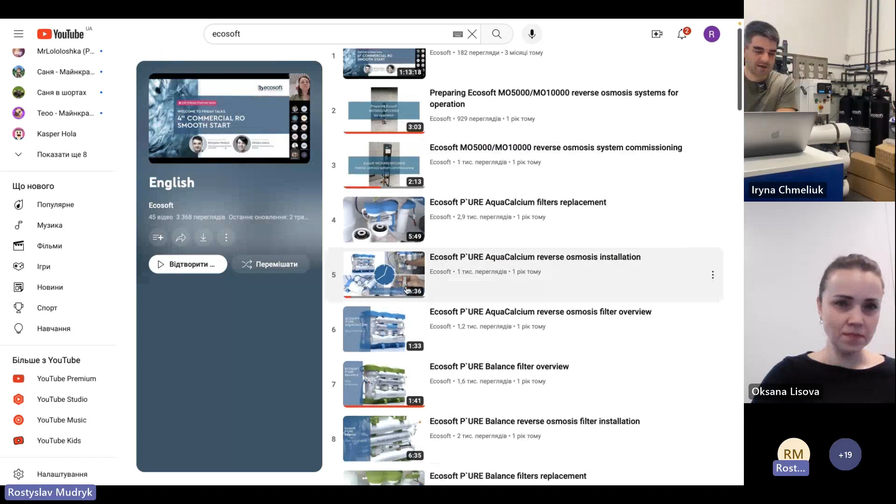So this is a little bit of the information part. And today we are going to talk about commercial reverse osmosis, industrial reverse osmosis units. As usual, I will start with the introduction of these units on our web page. We work a lot on ecosoft.com, so if you don't visit it for a week or two, you will find more and more information uploaded. So I always advise, if you need information on a product, just go online, go to the product card you are interested in, and you will find new information available.

So today our topic is 8-inch RO units. Basically we produce two lines: the inox line and the regular line. The capacity of the units ranges from 2 membrane elements, the smallest, up to 9 membrane elements in the inox version, and the regular series ends with 48 membrane elements in one unit. We also have a range of 8-inch membrane elements that we recently added to the web page, so you may find both the technical documentation and the product portfolio on industrial membranes, starting with the Ecosoft low pressure membrane, as well as the FilmTec membranes that we use in our units.

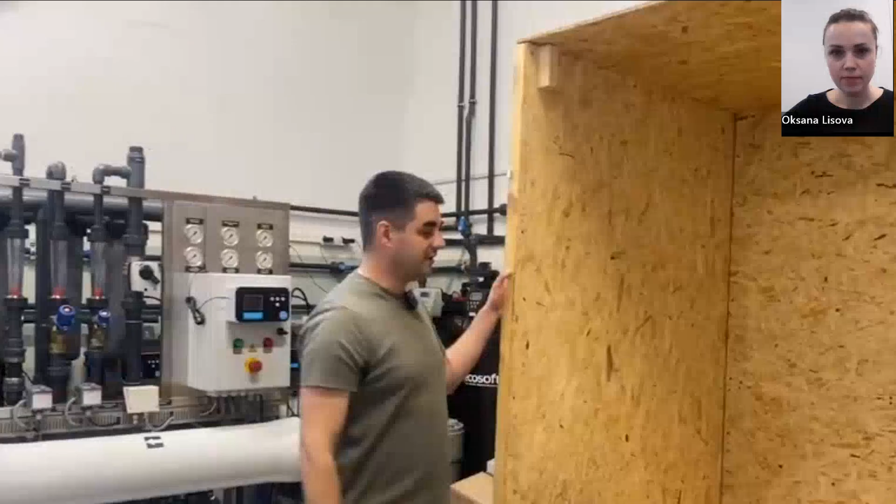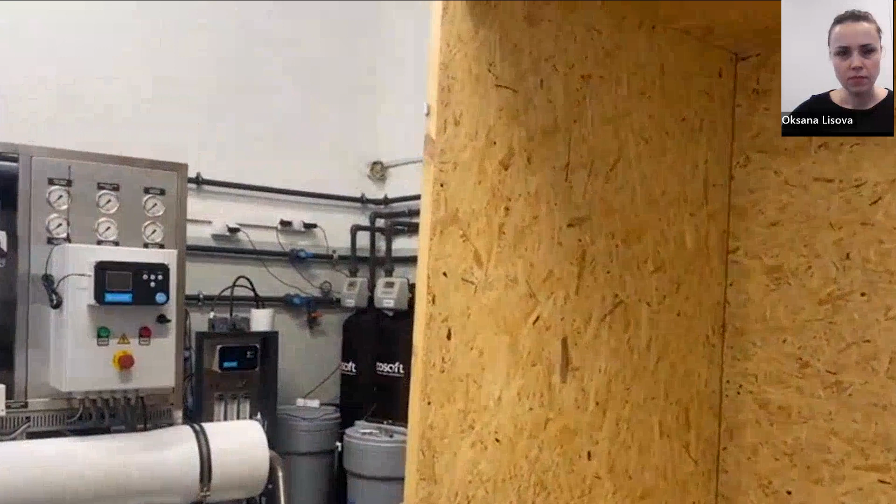So first, we have to explain that all the units are delivered in a wooden crate. So this is the wooden crate with easy removal of the wall. By supplying this way, we ensure that you will get the unit safely. Then inside the crate you will find, of course, the unit. We just extracted it from the wooden crate, and also you have a secret box. Why is it secret? Because

Many customers. Rosti, I'm sorry. Maybe something is wrong with the sound, because I suppose we hear you not through the microphone, we hear you through the laptop. Yes, give me a moment. This is the microphone. Thank you. Now you should hear me better. Try to come closer to the crate and then speak.

Let's check. So this is the box with the small parts, and I call it a secret box now, because many customers just forget. They take it out of the box and just forget about it. But inside there is much useful information and many useful parts. So first of all, you have a folder with the documents, and I will show briefly. So this is the manual for the electrical part. This is very useful. I will come back to it later.

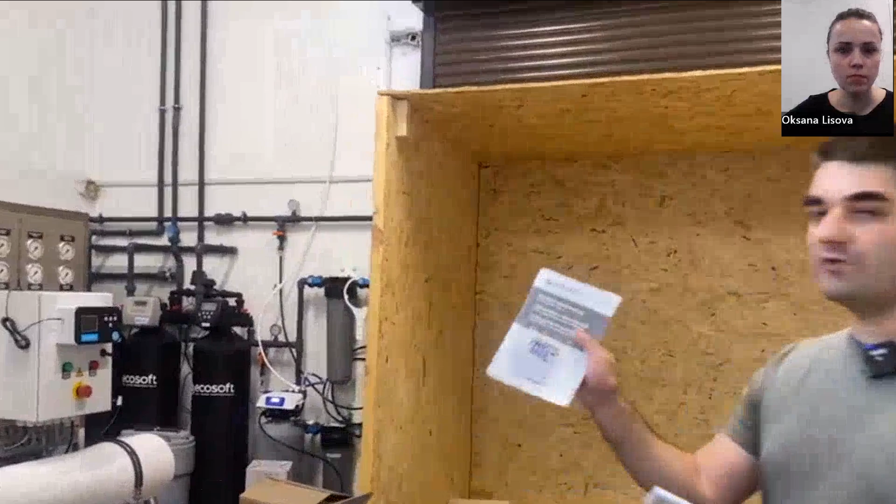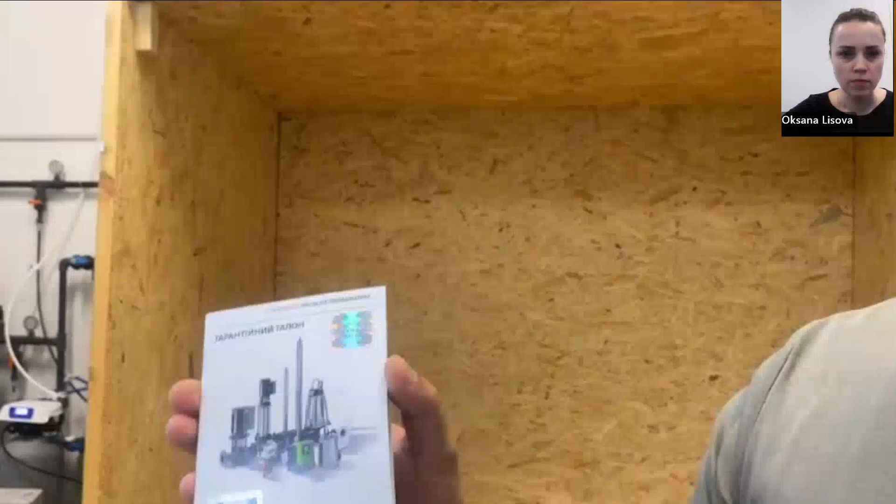Then you have a warranty. Then you have the manuals, both for the system and for the controller. Then you have the warranty for the Grundfos pump. This is very important because this is a worldwide warranty. So in any country where you do the startup, Grundfos supports the pump.

And if you have any problems during the startup, or any failures during operation, you may contact the local Grundfos service center via us or directly, and then you would receive support from Grundfos globally. This is very important. Also, you have the installation and instruction manual for the CR pump.

As this unit is equipped with the Econnect controller, it has the plastic SIM card. The SIM card is already installed in the controller, but the holder of the card is here. So if you have any issues, you have the identification number of the SIM card. So it's better to keep it. When you contact technical support, you can tell them the number, and then they will understand what system you are starting up. So basically, this is the scope of supply.

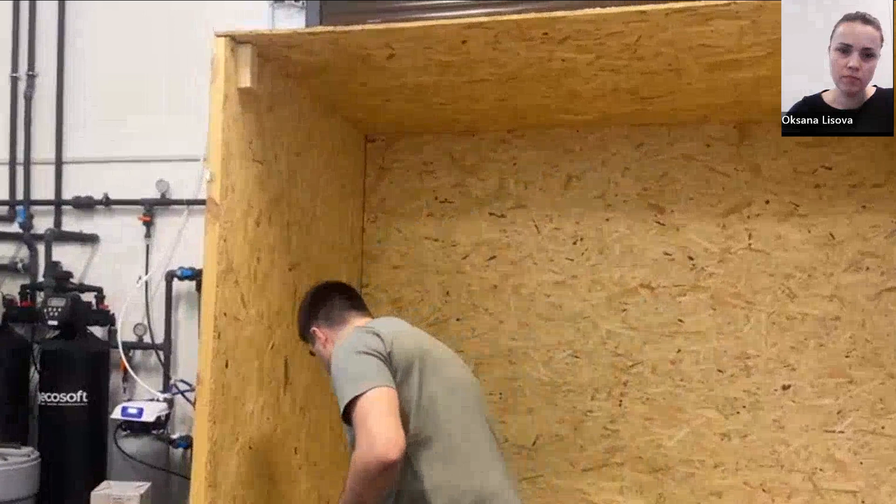This is the documents I have shown. Then you have the cartridges for the sediment filters, and also we have the adapters. These are the spare adapters. These are 1-inch adapters for the high rejection membrane, and this is a very small but important part. And inside the pressure vessels, we have the adapters that are installed for the high flow membranes. I will ask my colleague to show it.

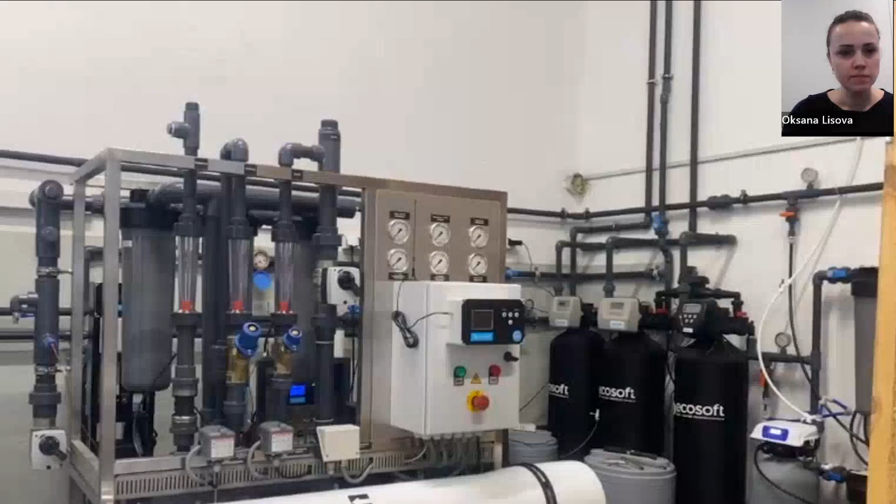And inside the unit, we have the 1.125 adapter installed. For example, if you use a membrane like XLE 440, which is a high flow membrane, you just leave this adapter in the pressure vessel. But if you use the high rejection membrane that provides a low flow, then you have to replace this permeate adapter with another one that is in the box.

So it is important that we supply 2 types, and you don't have to buy or source these adapters separately. But remember that they are in the box, so you have to find them there. I draw attention to this point because we have some requests to technical support where our dealers do not find these adapters and source them somewhere else, making the startup more complicated. So this is the answer, Oksana, to your question about the scope of supply.

Yeah, thank you, Rosti. If someone has any other questions regarding this, you may ask, of course, online, or you can ask your question via the chat. We already have questions. Yes. Maybe I can go through them.

So customer-made units are also available, not only the standard one. Of course we prefer to supply the standard units that we almost always have in stock. But if you have any special requirements, it would be nice to know these requirements, and then we have 2 options. Option number 1, we could meet these requirements by using standard units plus options that we have in stock. This is one way. There is also a second option.

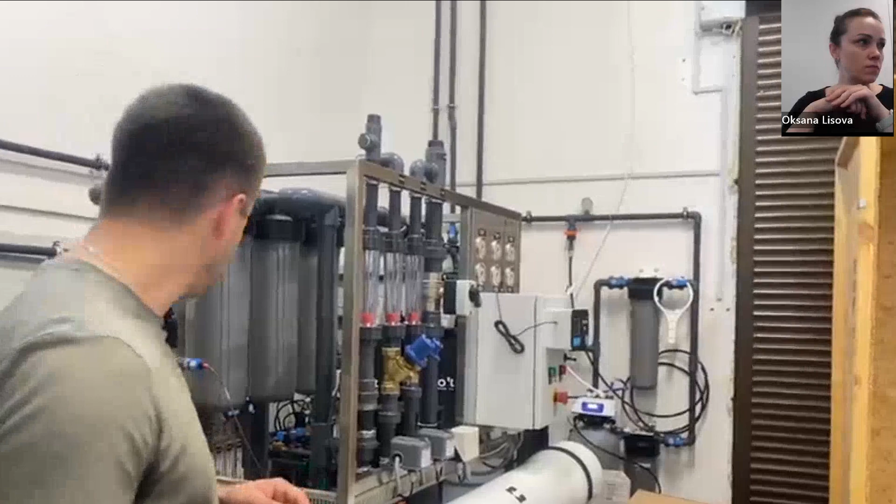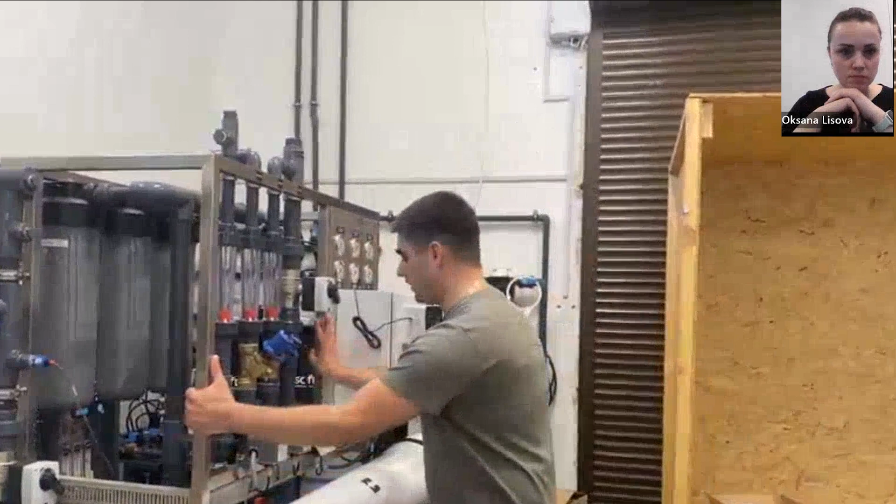So the inox line is not only the frame. When you buy an inox unit, it has the frame made of 304 stainless steel. Also, this inox line is equipped with wheels, so the system can be easily moved. I may show you how you can move it. Well, you need to apply some force, but generally it's quite easy to move this unit by one person.

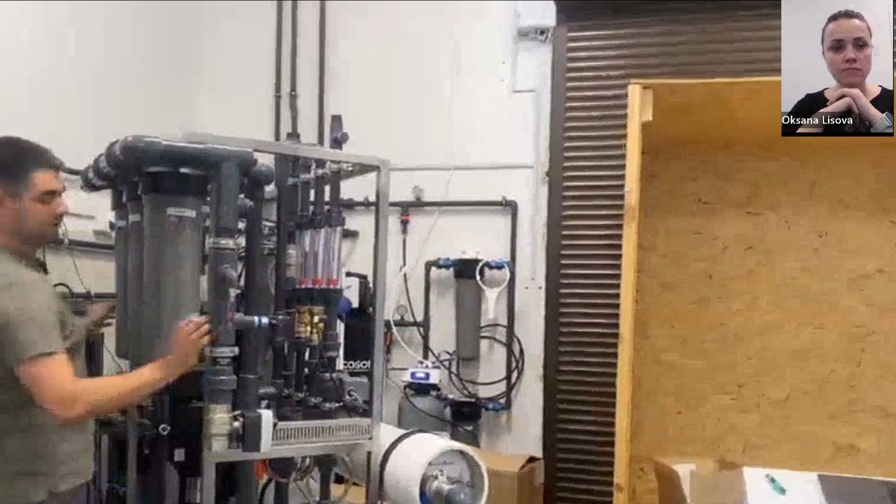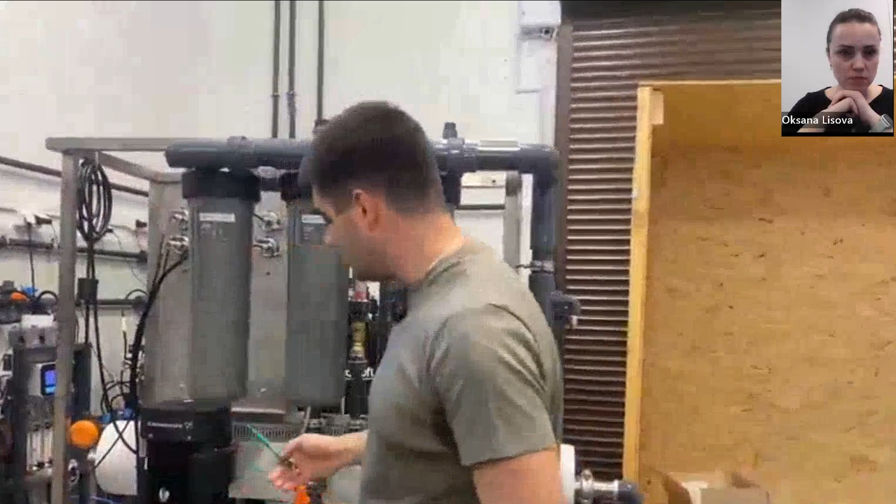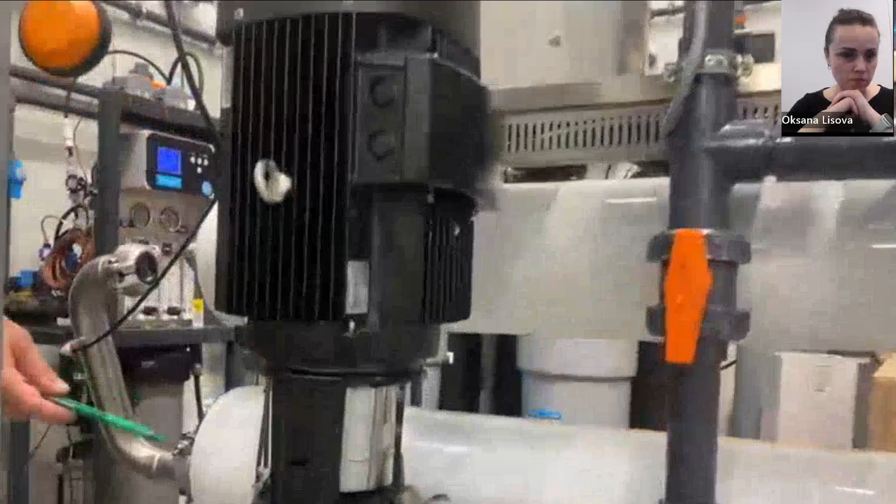And I would like to show what else besides the frame is made of stainless steel. I will stand here. So we have the high pressure line that connects the high pressure pump and the pressure vessels, also made of stainless steel. This is 316, and we may increase the pressure up to 15 bar. And this was our initial goal, just to produce a unit for the tap water, but made of stainless steel frame and stainless steel high pressure line.

And then eventually we discovered that many of our customers started utilizing these units for brackish water. So what they do, they put a little bit more powerful feed pump, not for 2 bar, but for 4 or 5 bar on the inlet. And then you can increase the operating pressure up to 15 bar. And if you have high temperature, like the Mediterranean countries or the Middle East, where the water temperature is a little bit higher than in the north of Europe, and if you use the XLE 440 membrane element or other high flow membrane element, basically you may do the desalination of brackish water with this particular unit.

And also this year and last year, we had a big project together with UNICEF in the south of Ukraine, where the water is delivered directly from the sea with TDS up to 7,000 ppm, and we actually utilized exactly this unit, the MO3, with Econnect for the desalination of water with even higher TDS. The only difference is that this unit provided around 1 or 1.5 cubes an hour of permeate, not 3 cubes an hour like we would have on tap water. But this is also an opportunity for how we could utilize our Inox series.

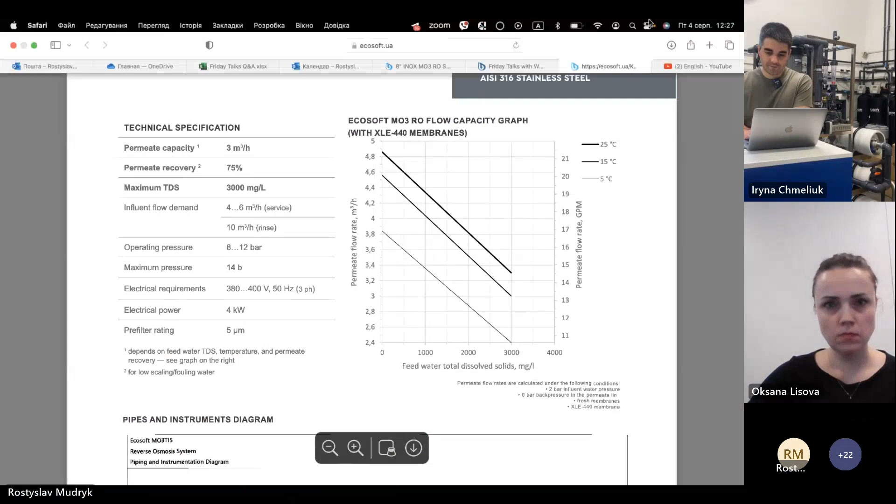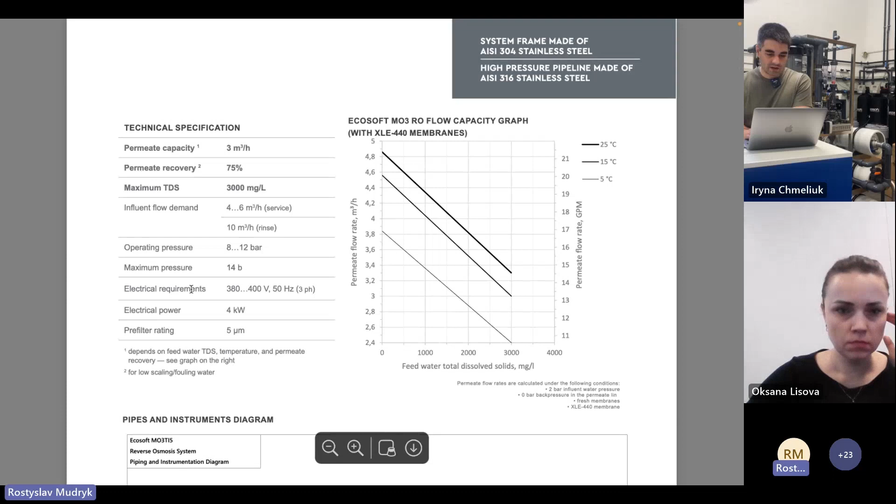So first, if you go to the main page at ecosoft.ua, here on the main page you have the button download the catalog. So you go to the catalog, and you may find the MO3, for example, this one. And here you have the graph that explains the influence of the feed water TDS and the temperature. We have here the curves for the 3 temperatures that I mentioned.

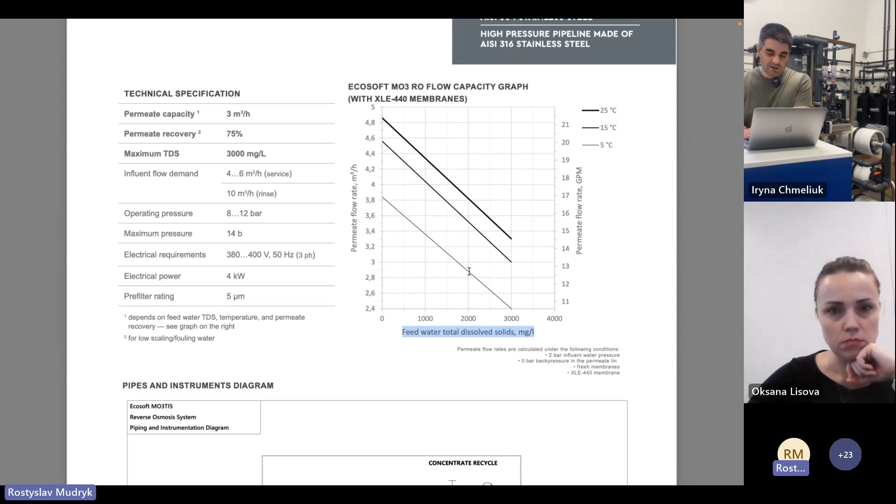And then you may find the capacity. For example, if you are in the north of Europe, in one of the Scandinavian countries, then you take 5 Celsius, and if your TDS is 2000 ppm, then your flow rate at 5 degrees Celsius and 2000 ppm would be a little bit less. It's like 2.9 cubes an hour.

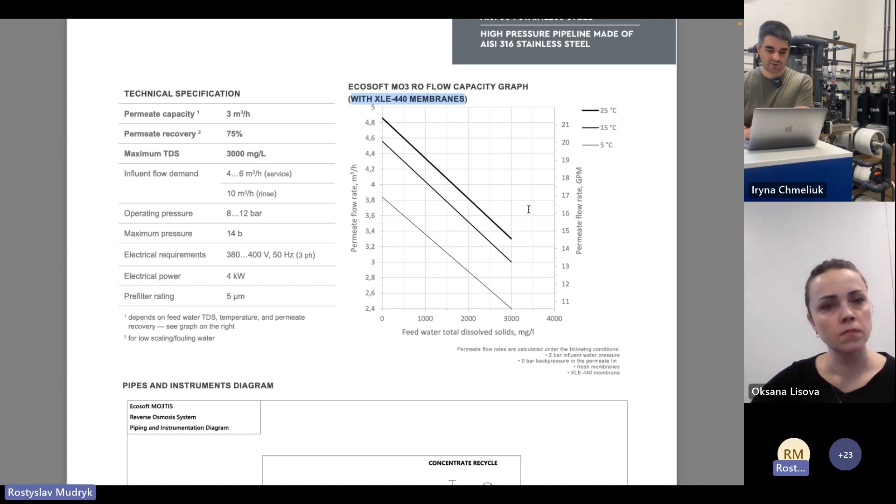It's important to mention if you use XLE-440. If you would use another membrane element, then you would have to do the calculation by yourself, or you may contact our technical support and they will assist you with the calculation.

Then we have a question from Raivis, perhaps. Yeah, you are absolutely right. It would be much easier to do the maintenance if the filters are located in front, and this is one of the projects that we are working on, to reframe the units and to make them more friendly for the maintenance, more, as we say, friendly to water professionals.

So then there is a question from Jalal about the 4,500 ppm TDS and the high recovery. So in this particular case, I would not go so high. With this kind of TDS, I would be around 70–75% of recovery. And what I would do, I would do the calculation for the saturation of the unit and for the saturation of the water. And I would also do the calculation of the performance in WAVE to see what would be the pressure and what would be the right membrane for this particular application.

For example, in the south of Ukraine, where we have the TDS of around 6,000 to 7,000 ppm, we go to the recovery rate from 50 to 60%. And by this, we reduce the salt concentration on the concentrate line. So this is the way how we use our serial products to treat water with high TDS.

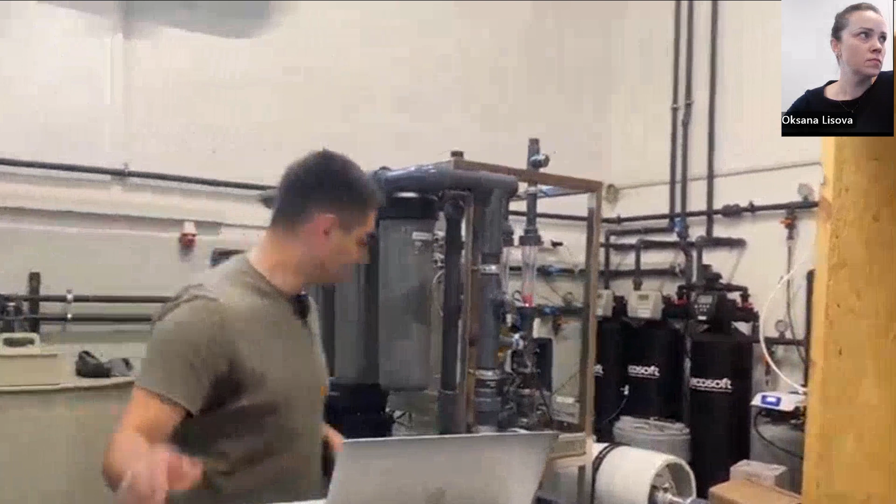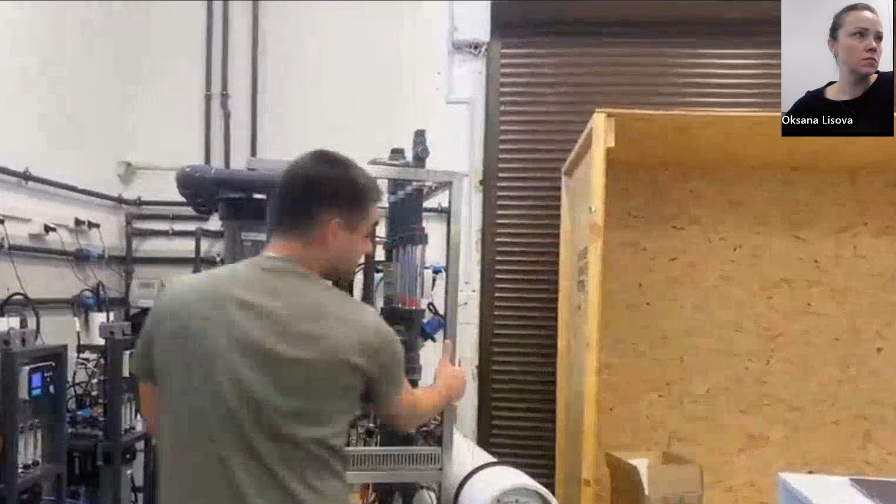Yeah, the system we have actually, I would like to show. I have to move the system again. Well, it has wheels, but sometimes you need a little bit more force. So I will ask if we can show.

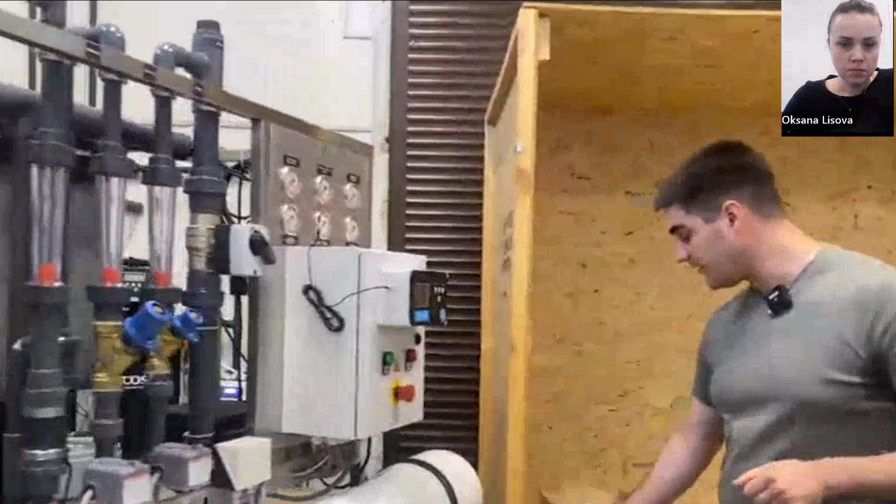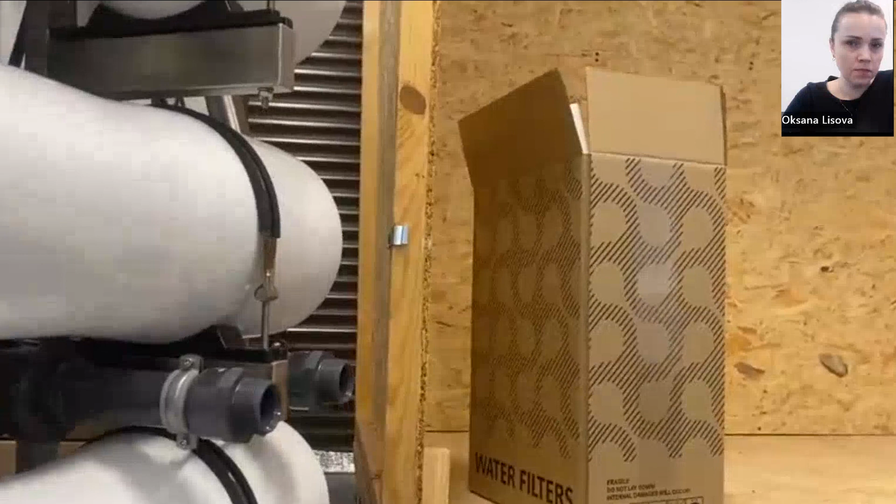So here we have the CIP inlet and outlet. So these are 2 threads, and these are ready to connect. So you may connect the CIP station to this particular unit, and then you could do the CIP right at the customer's place.

Also on the web page, you may find the information on the CIP available, because for all units that we have in stock, we have standard CIP stations that you may use to clean the systems. And of course, we may provide our manual on the CIP procedure as well as chemicals to do the cleaning, because we have quite a lot of experience doing that.

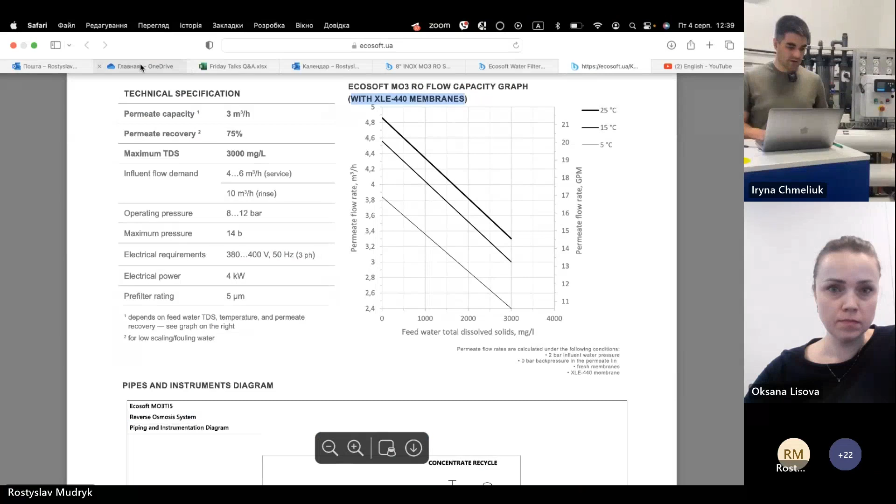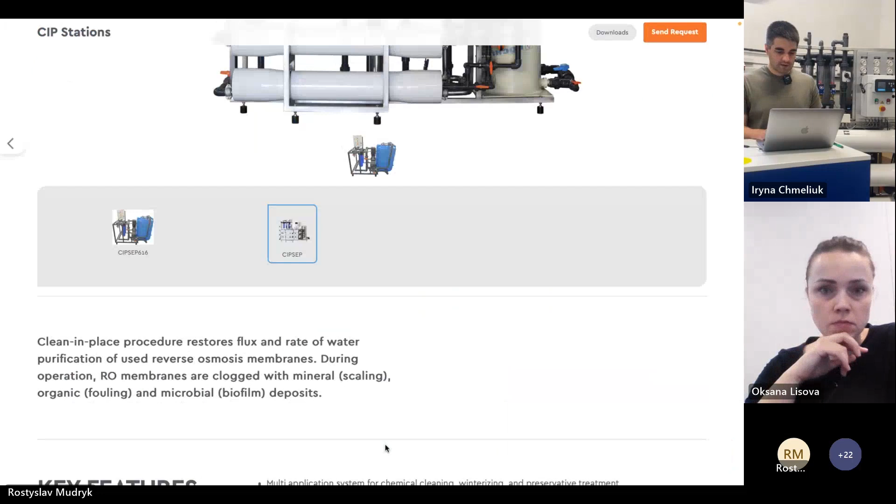Rosti, can you please extend the topic about CIP, because we also have the question from Enrico about our own CIP stations. What is the range? How do we divide them? So now you may see my screen. You may go to the web page and then go to the CIP station. Let me browse a little bit. Just a moment, I wouldn't go to the price lists, but we have the CIP units.

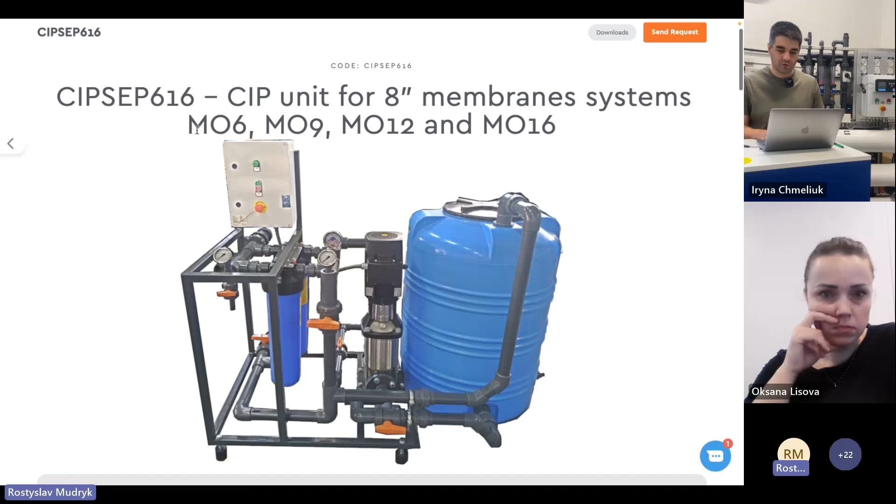For example, this one is good for units from 6 to 16 membrane elements. So this is one CIP station, and then here we have another one that fits RO units with 2, 3, and 4 membrane elements. And also, of course, we have larger ones that are tailor-made for the customer needs. But these two cover the complete range.

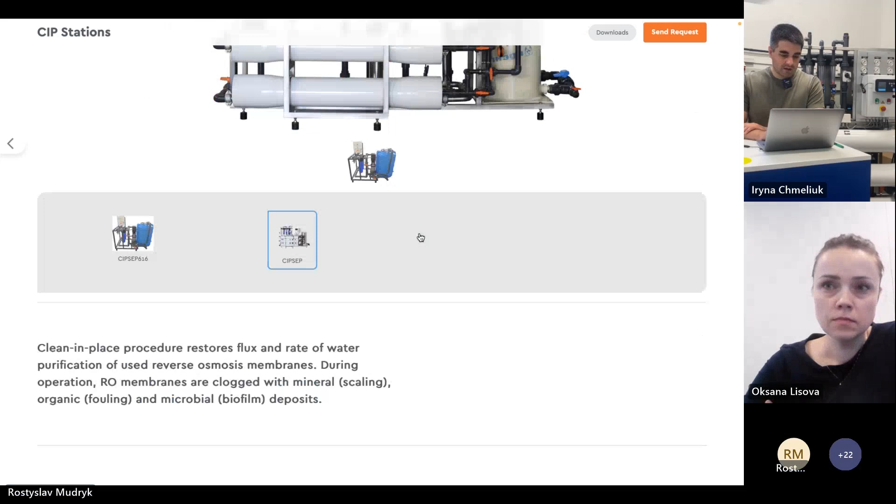Sorry, Rosti, I interrupt you. In most cases, the bigger ones, starting from MO16, like MO20, already have it built into the system. So they are integrated on the big industrial systems. Well, this is one of the options. We may also integrate the CIP stations in the larger units, as well as supply them separately.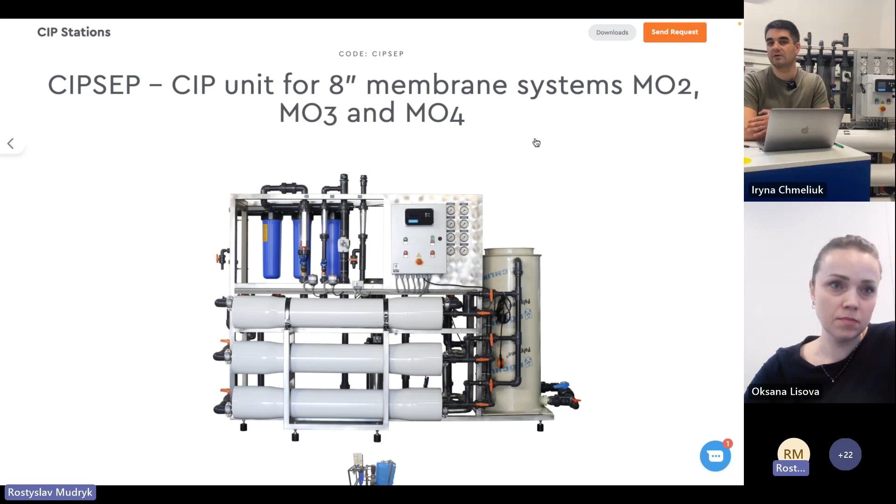Normally we do not provide the CIP stations on board. We prefer to supply them separately, because if it is on board, it makes the unit a little bit more complicated, and it is not always needed. I hope this answers your questions.

We have the question from Ravis. Yeah, there is a question.

So when we supply the CIP station, it has the flexible hoses, and then it has the fittings that make it quite easy to make the thread connection. We do not supply it with the clamps, because clamps are something more special, and maybe you will use your type of clamps. So we prefer to provide standard threads rather than clamps. This is the reason why we do so. But I agree that the fast connection maybe is more convenient for you.

Then we have a question from Enrico. Can you explain what SMBS is, so that I understand what you mean, and then I will provide the answer. What does SMBS stand for? Sodium. Okay. Well, when we do the CIP, we do not suggest doing it with sodium hypochlorite or chloric acid, because if the people on site are not experienced enough, they may easily exceed the pH level. This is the reason why we do not recommend using the pure chemicals. What we recommend is the chemicals provided under the Ecosoft or BWT brand, the special chemicals that have a buffer, so it's not easy to shift the pH outside the limits.

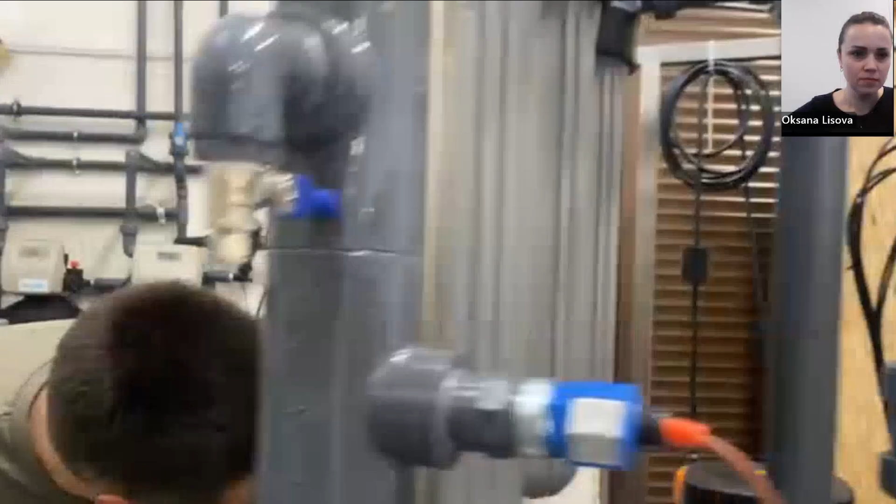Yeah, first of all, I would start answering your question, and then I will show how we suggest to do it. So if we talk about MO3 in the inox version and in the regular version, we would use the same pump, and it is CR. I'm asking Vitaly, my colleague, what is the name of the pump? Is it CR, this one? Yeah. This is CR 10-12, and this particular pump is used for both MO3 inox and the regular one. And of course, we can provide you information on the pump on all other units. But I would like to show you, I think I wouldn't move the system again. And also, you may use the Grundfos data center.

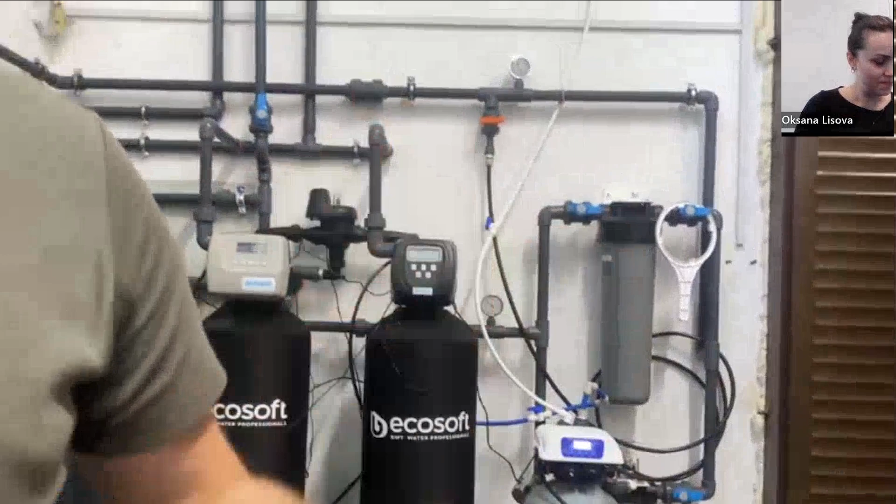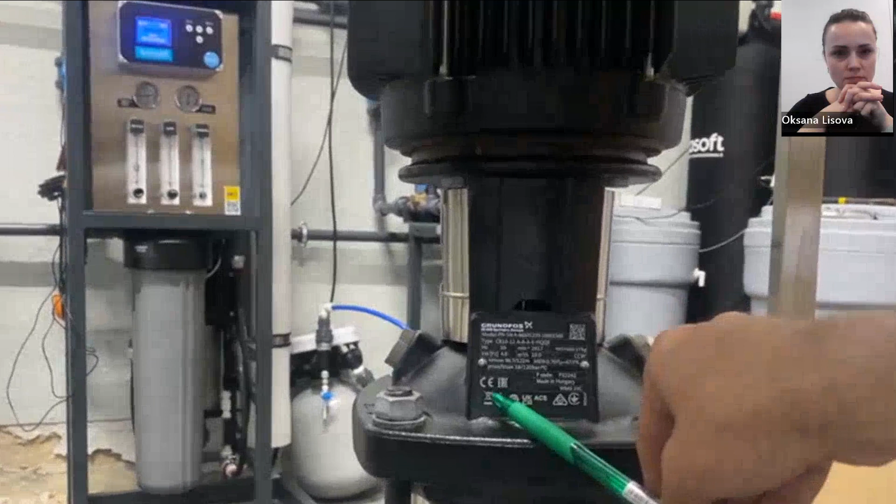And then on this shield, you may see, actually, I think we should go in front, it's better to show in front. I'm asking Vitaly to show because, to be honest, I've never checked the curves online in the Grundfos data center. But on this shield, you have to take this long number. Which one? So this is the number that is mentioned in the type. So this is CR 10-12 AAA, a little bit down, E. So when you input this particular number in the Grundfos product data center, then you would have the curve exactly on this model, and you may see the pump performance straight away. And maybe I will ask Alexei to put the link here on the Grundfos product data center, so that everyone knows exactly what we mean by Grundfos product data center.

Also, I have to add to the question of Oksana on the Grundfos. So on all RO units, we use the CR pump. This is the vertical pump with stainless steel parts inside. All the parts inside the pump that are in contact with water are made of stainless steel 304. And we could use these pumps up to 4,500 ppm on the feed water. And also, I would repeat it once again, I mentioned it in the beginning. We have the global warranty from the Grundfos factory on all pumps, of course on the CR pumps and also on the CM pumps that we supply with the 4-inch commercial RO units. And if you have any problems during the startup or maintenance, you may contact Grundfos locally by yourself, or you may contact them via Ecosoft, and then we help to solve the technical issues with the Grundfos pump in your country.

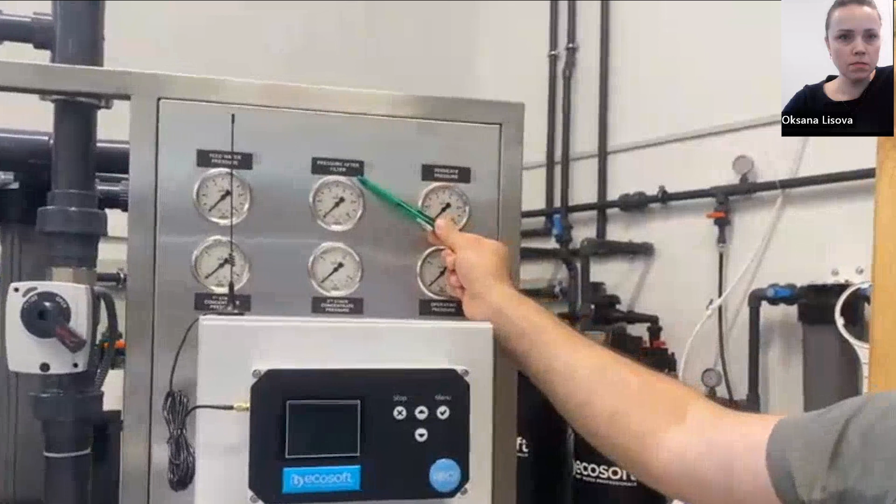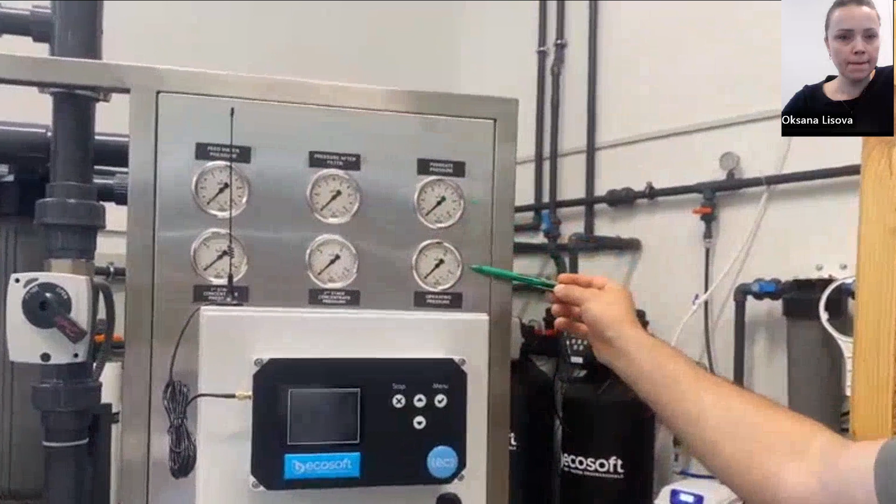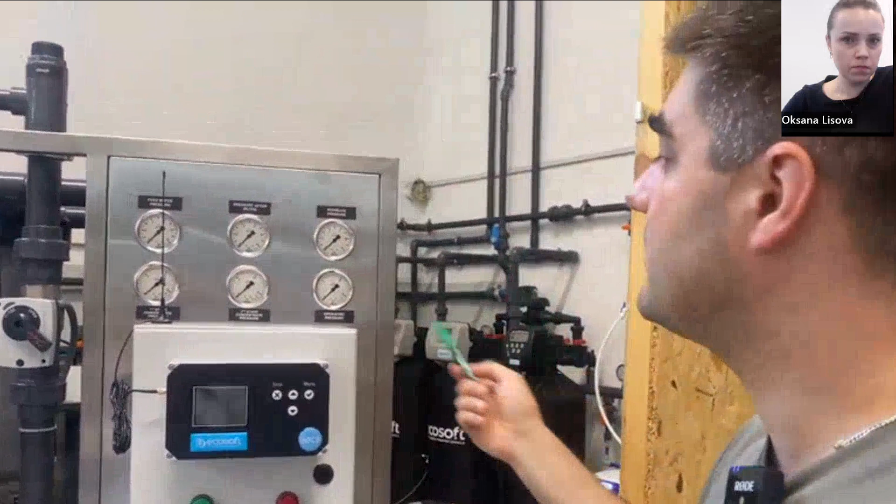On the unit, I see 6 pressure gauges. Is it a double pass? No, this is not a double pass at all. Let me explain a little bit the pressure gauges, since the question appears. So we have the feed pressure, then the pressure after the sediment filter, then the permeate pressure, and then the concentrate pressure after the first stage and after the second stage, and the operating pressure is the pressure just after the pump. So this is 2-stage by concentrate, not by permeate, and this is why we have the 6 pressure gauges.

And maybe I could also extend my answer a little bit on the double pass units. This is not an everyday question, but from time to time we receive questions on double pass RO, and we have big experience building double pass schemes based on standard units. What we do, we calculate 2 units separately, and then we install 2 units on site. Very often, these are units with a different number of membrane elements and different types of membrane elements inside. And in between, normally we install a pressure tank to make a water buffer between the units. Very often, we also install pH correction between the 2 units.

And we also may help you to complete this kind of scheme, the double pass on permeate by permeate, using the standard units. Yeah, now, Oksana, I believe you may have some more questions.

Yeah, I do have. To be honest, I have quite a lot more questions, and I think we need to extend this topic for the next Friday talks as well, because we will not be able to cover all of them. So to finalize this meeting, can you also please tell about the options that we have, as we talked about the options already, permeate flushing and blending kit?

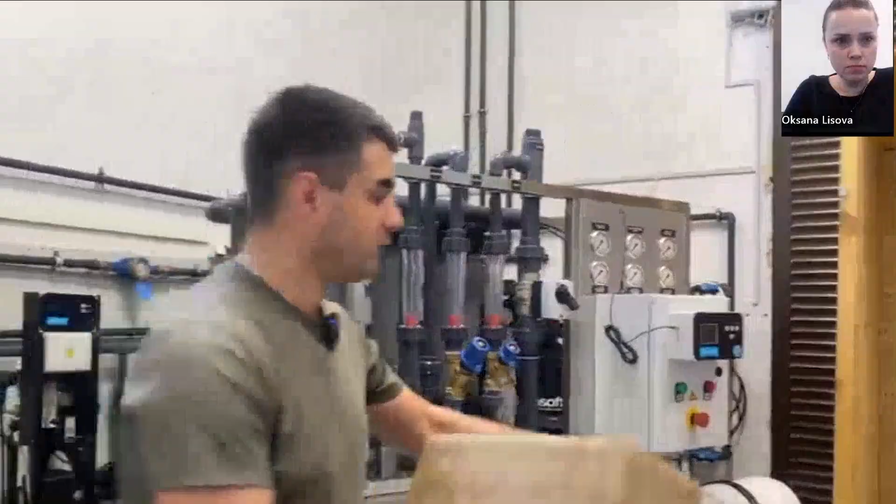And so I will bring it here. I will put it here, and then we will explain a little bit the product. So. Put it like this.

So when we say the options, basically these options are supplied in separate boxes, and for this MO3 we have two options available. So this is IMO, and these values mean that this particular box would fit MO units with 1, 2, 3, and 4 membrane element systems. And I stands for the injection. So it means that this part is for water blending. So we may blend feed water to the permeate when we use this box.

We have also the second box that is called PMO. MO and the numbers I have already explained, it has the same meaning. P means permeate. It means that this box is designed for the permeate flushing. And we may look inside. Of course, everything is well packed. I did the unpacking already. But here you have the already assembled part for the water injection.

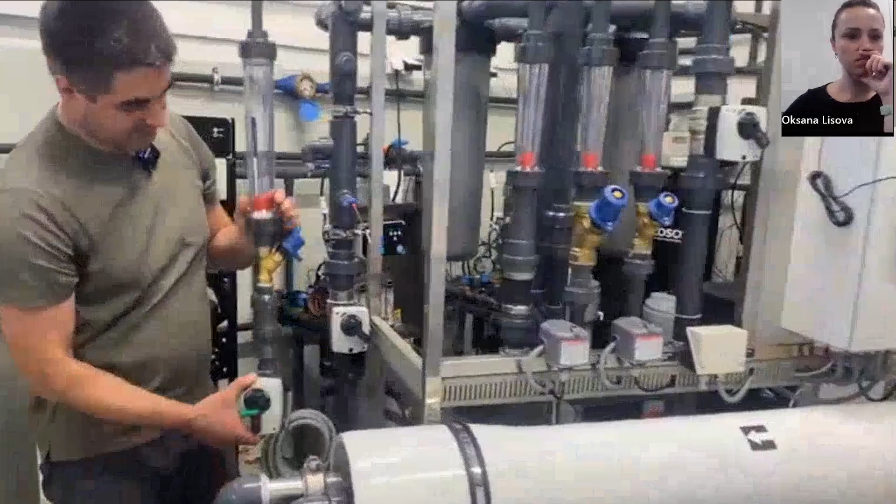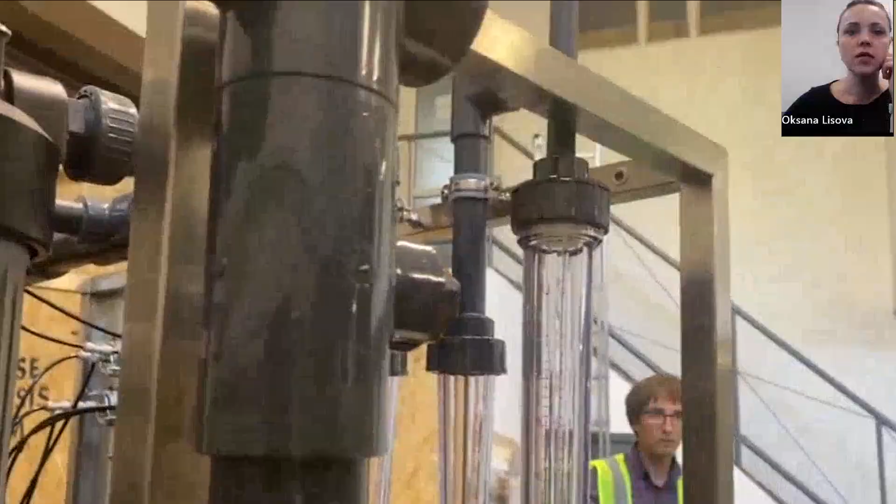Basically, you have a place here. So what you normally do, you may mount it here. So here I will ask to show the camera from the back part, from this side, please. So you have the special nuts here, and also you have the... Rosti, just a second, because we do not see anything. Can you show the nuts more clearly?

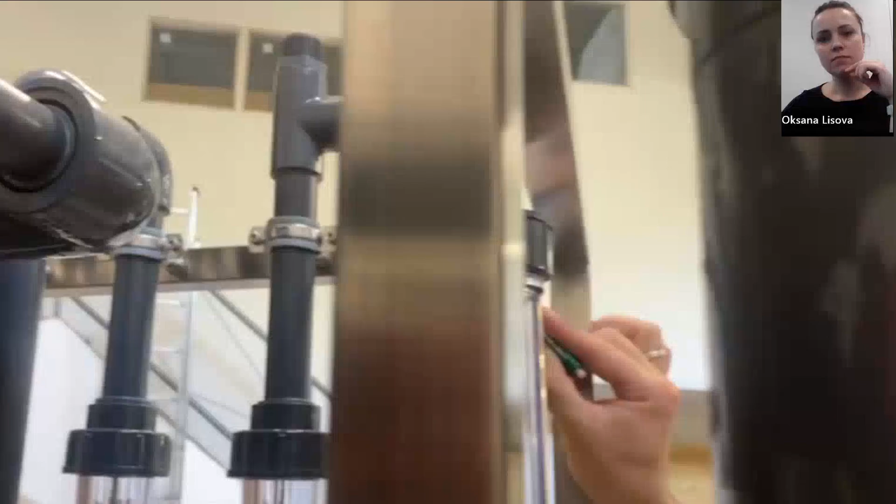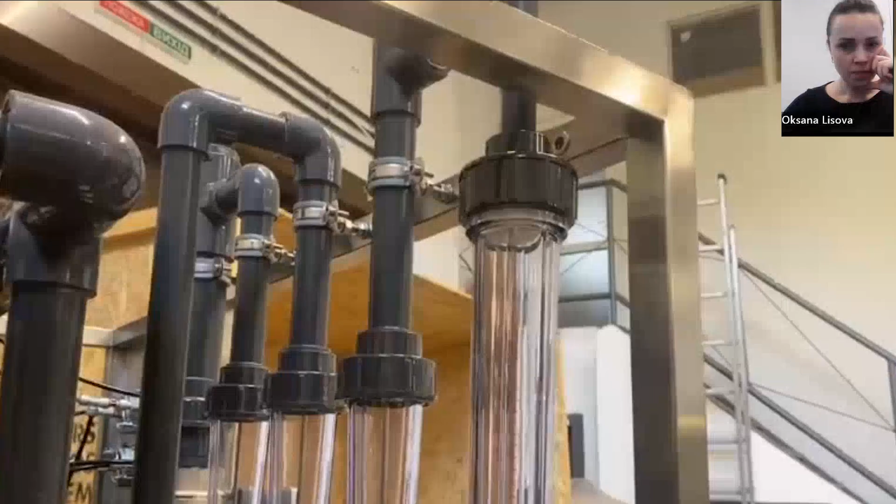So these are the nuts. Maybe it's not the right English. These are the holes with the thread, not the nuts. This is the hole with the thread for the clamps that are in the box, and you just connect the blending kit here, and also you have the electrical connection. So it's quite easy. You connect the blending kit to the power panel. But how to connect to the power panel, you will learn next Friday.

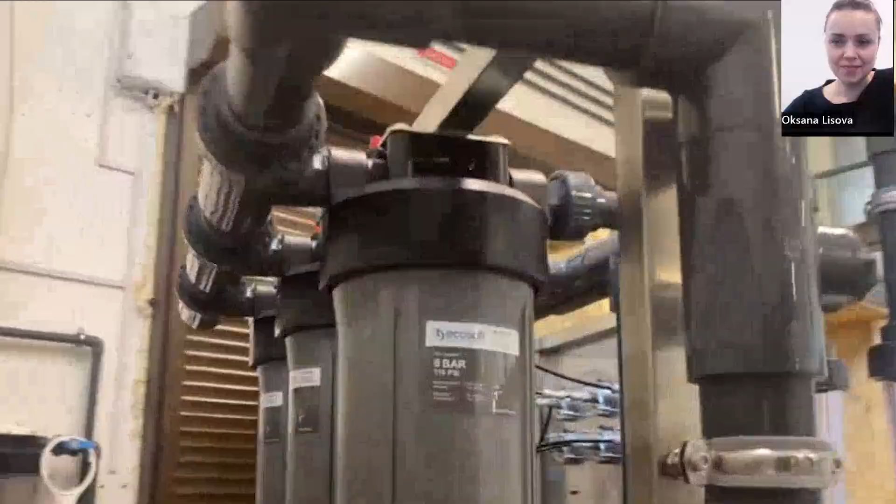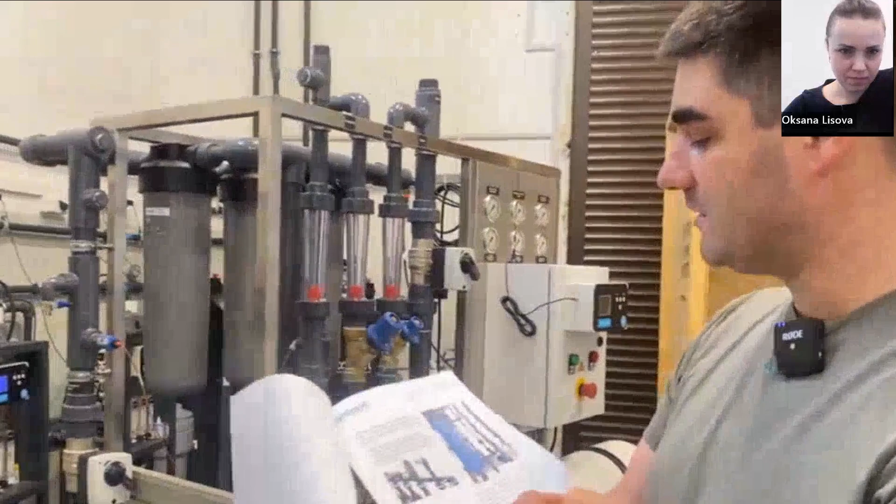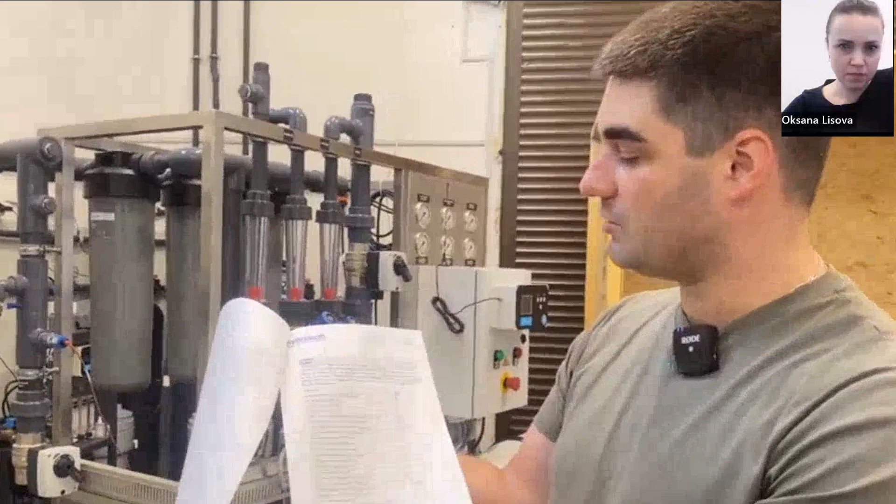And what is also important is that we have the manual inside with the steps on how to do that. And we explain not only the hydraulic connection, but the electrical connection, and also how you have to change the settings. So this is the answer to your question.

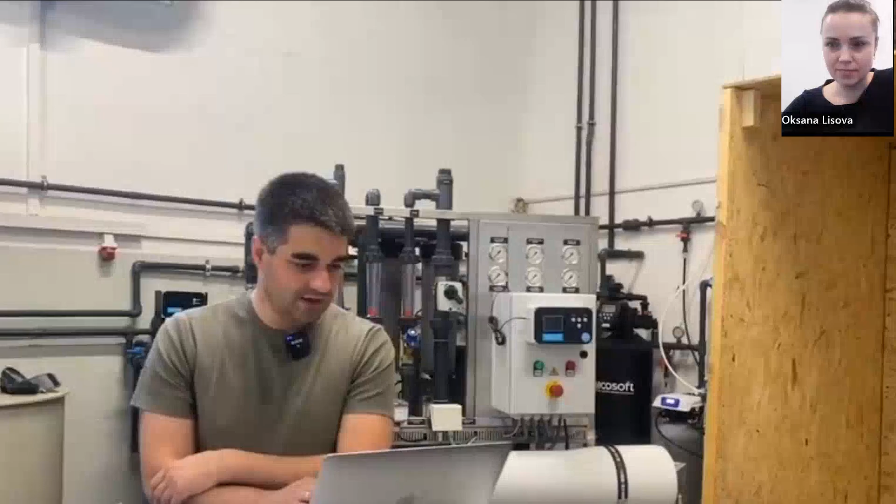Great. I think we have to finish for today. Yes, and I will provide the answer on the flushing kit next Friday. We have another request from Rick: can we do a session on troubleshooting and water pretreatment? Yes, of course we can.

And we would much appreciate if you could share with us your cases if you faced any troubles. Especially troubles. This is actually our favorite part of the job, to fix various complicated cases where you have to meet the customer requirements, especially when you have some limitations on the water quality, the water quantity, space. So Rick, if you have any interesting cases, please provide them to us. If not, we have ours.